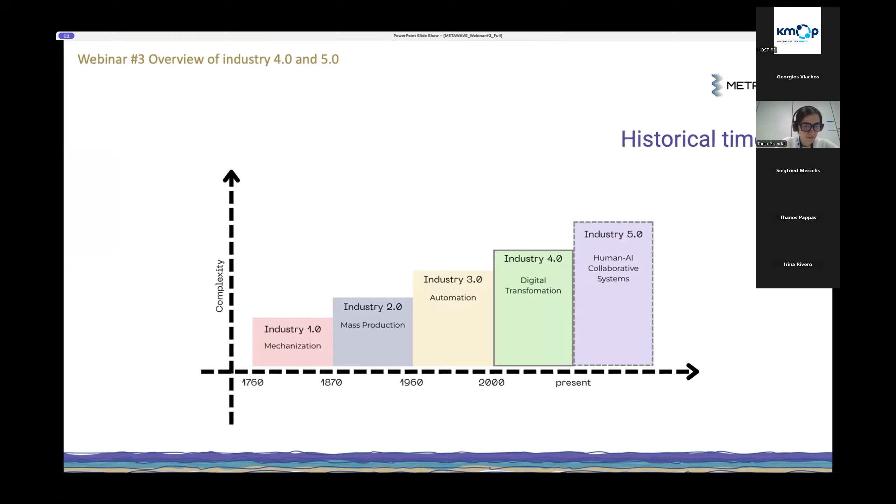Let's frame our discussion by identifying the key characteristics and differences between Industry 4.0 and 5.0. To do so, it's useful to take a quick look back and overview the progress of the industrial revolution.

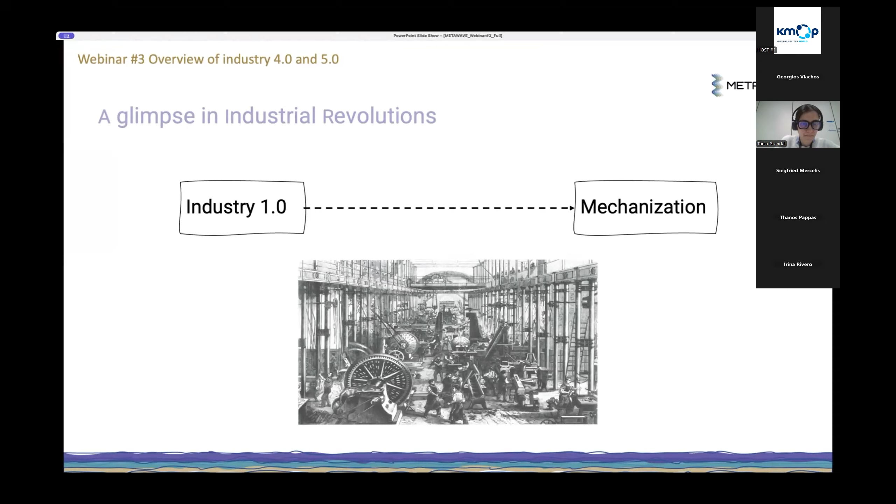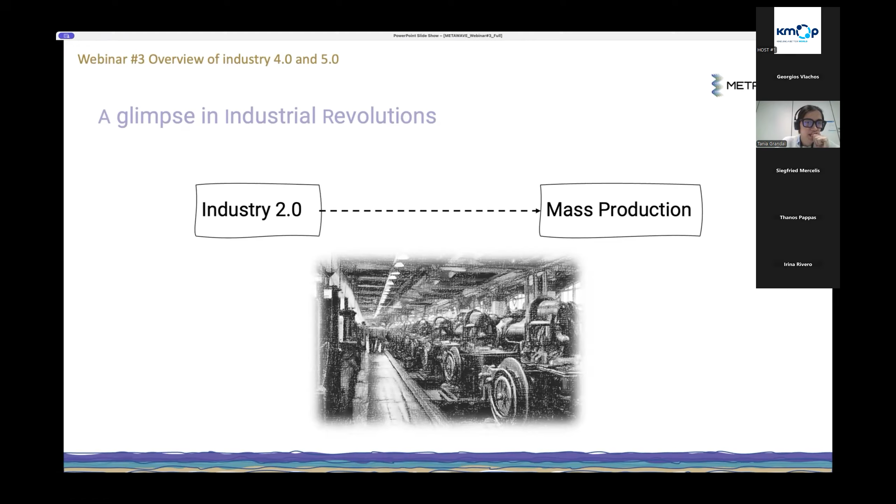We have Industry 1.0, which took place in the 18th and 19th century and introduced mechanization through water and steam power. Then we have Industry 2.0, which occurred in the late 19th and early 20th century, which brought mass production driven by electricity and the assembly line.

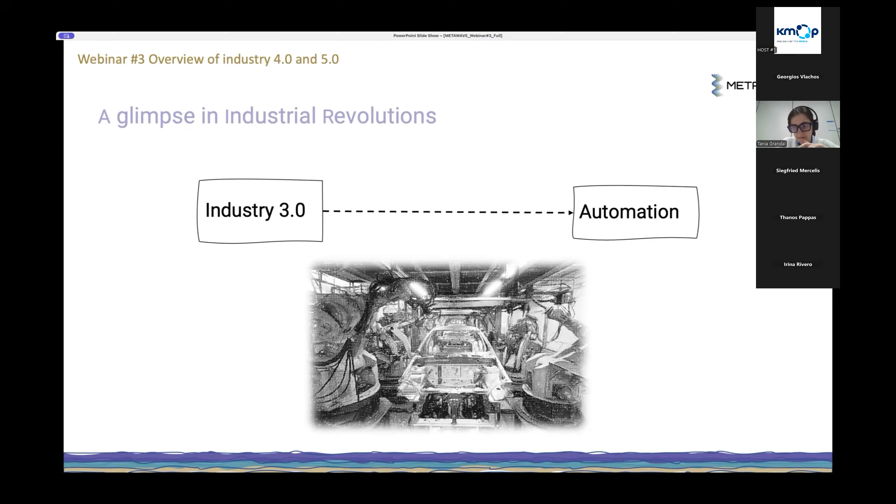Afterwards, we have Industry 3.0, which started and finished in the 20th century and saw the introduction of computers and automation. Then we arrive at Industry 4.0, the current phase, where machines have become smart and connected.

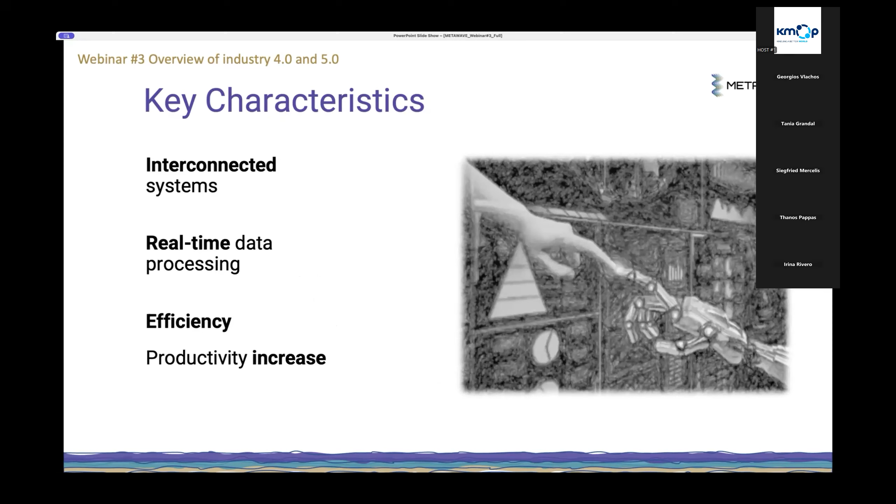At the core of Industry 4.0 is the fusion of cyber-physical systems, the Internet of Things, and cloud computing. This has enabled machines to collect, share, and act on data, fundamentally changing how we produce and operate. Key features include interconnected systems, real-time data processing, and a strong focus on boosting both efficiency and productivity.

The backbone of Industry 4.0 includes the Internet of Things for smart connectivity, AI for intelligent decision-making, cloud computing for flexible infrastructure, big data analytics to extract insights, and cyber-physical systems that bridge the digital and physical worlds.

These technologies drive innovations like smart factories, digital twins which represent virtual replicas of physical systems, predictive maintenance, additive manufacturing, and even autonomous vehicles.

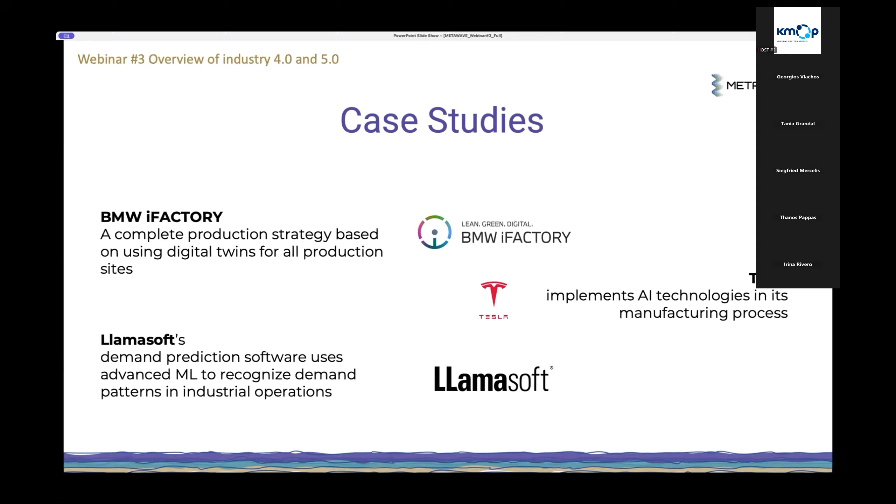For example, BMW's iFactory strategy leverages digital twins to optimize every production site. Tesla uses AI extensively in its manufacturing processes, and companies like Llamasoft are predicting demand using advanced machine learning.

So what's next? That's where Industry 5.0 enters the discussion. Industry 5.0 reintroduces the human touch. It's about using technology with people, not just to replace them. It values creativity, resilience, and sustainability alongside productivity.

This new phase prioritizes a human-centric approach, ethical and sustainable production, innovation through human creativity, and meaningful collaboration between people and intelligent systems.

Some applications include advanced human-machine interaction through extended reality, which includes virtual reality, augmented reality, and mixed reality. For instance, AR can project live maintenance instructions onto a machine as a technician works on it, reducing errors and training time.

Smart factories not only automate processes but also allow for real-time human oversight and decision making that helps rather than replaces human insight.

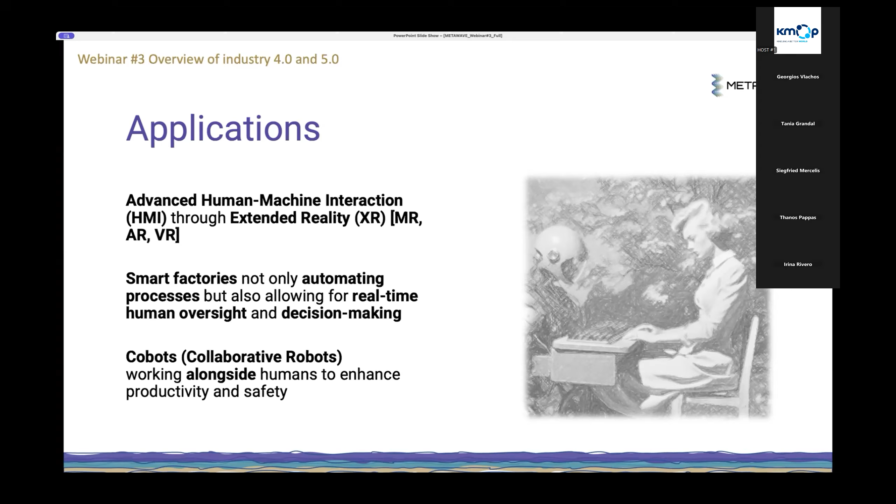Also, cobots, or collaborative robots, that work alongside humans.

Let's bring some of these ideas to life with real case studies. One great example is in healthcare, specifically in the area of robot-assisted surgery. You might have heard of the Da Vinci surgical system. It's a perfect case of human-machine collaboration.

Surgeons use this system to perform incredibly precise operations, but they are not replaced by the machine. They are in full control. The robot enhances the surgeon's natural hand movements, filters out tremors, and gives them a much more detailed view, we can say.

Another great example comes from Schneider Electric and their smart factory in France. They have integrated collaborative robots, real-time energy monitoring, and digital twin technology.

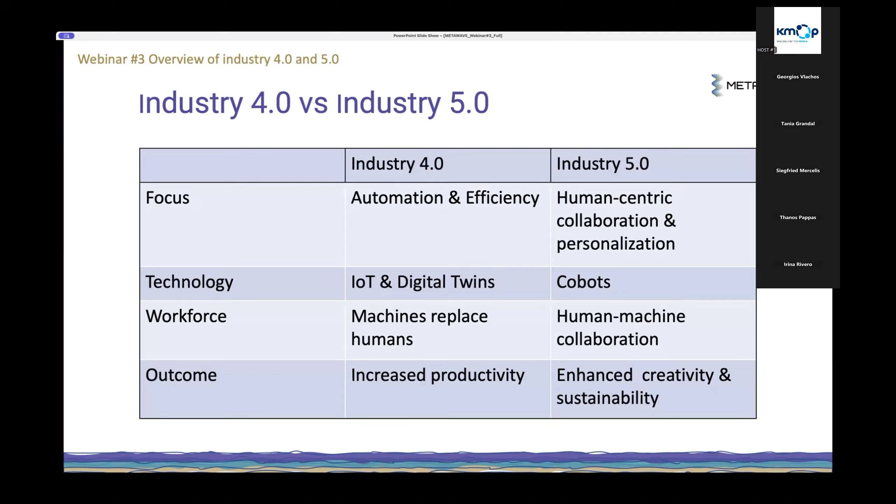So how do the two compare? Industry 4.0 is about automation and digital efficiency, while Industry 5.0 adds personalization, human creativity, and sustainable values.

Bridging these eras means creating environments where digital and human elements work seamlessly. That's where immersive tools like the industrial metaverse come in. This virtual environment mirrors real-world industrial systems, allowing simulations, training, and decision-making to happen in real time.

AI and machine learning remain foundational to both Industry 4.0 and 5.0. While manufacturing leads in adopting these changes, more traditional industries face challenges due to older infrastructure. Strategic planning is critical for successful integration.

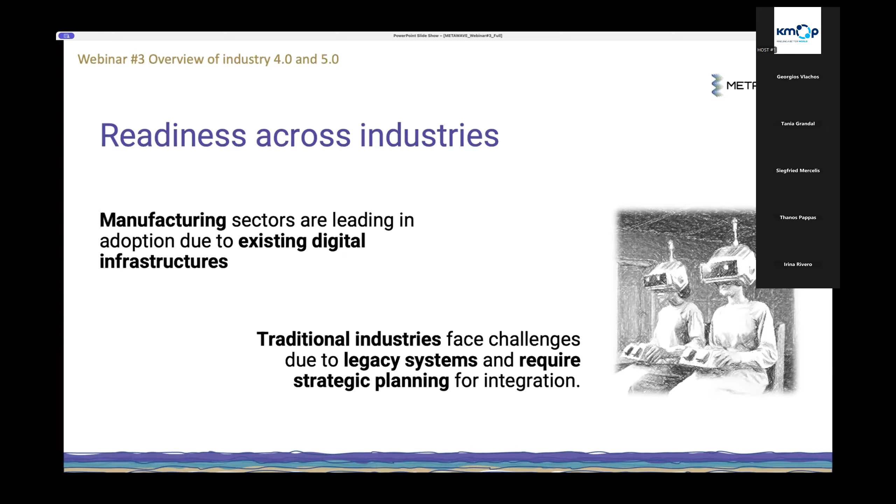In summary, we are moving from smart automation toward a truly collaborative future. That's all from me. Are there any questions?

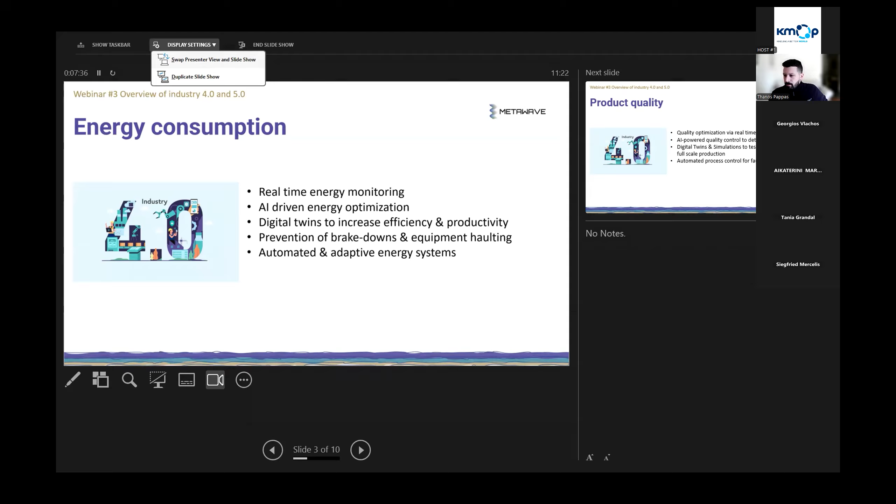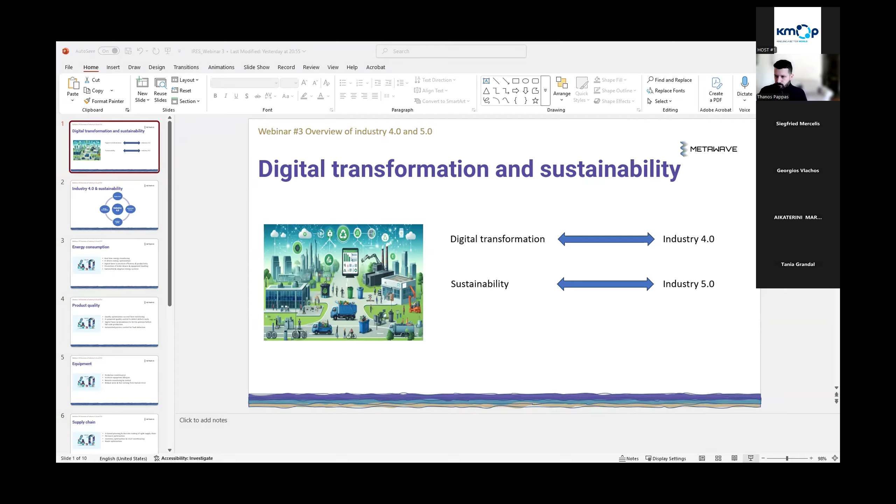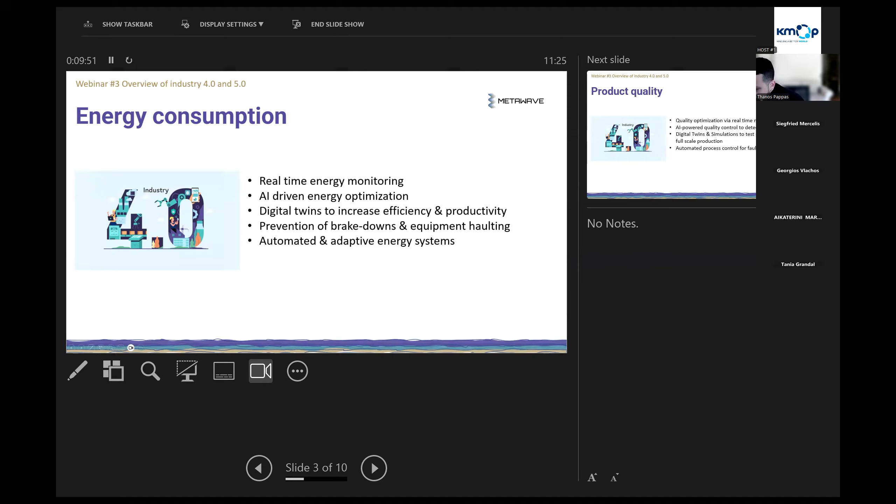Okay, it's enough. Sorry. Which screen I'm sharing now? Digital transformation sustainability. But is it like the whole presentation, or just the presentation mode? It's not full screen, it's just a PowerPoint that we're seeing now. If you share your screen in general and not the specific PowerPoint, this is like because I have two screens, I wonder which one of the two is going to share. Which screen are you seeing now? The third slide. Yeah, but is it the full slide? Because if it is the full slide, then we're good to go. Presenter mode now. Yeah, now we're seeing the full screen, now it's the full slide, yes. Okay.

Okay, so I'm going to continue from where I left. Now you can see the slide which says energy consumption and only that, right? Yes, that's right. Okay.

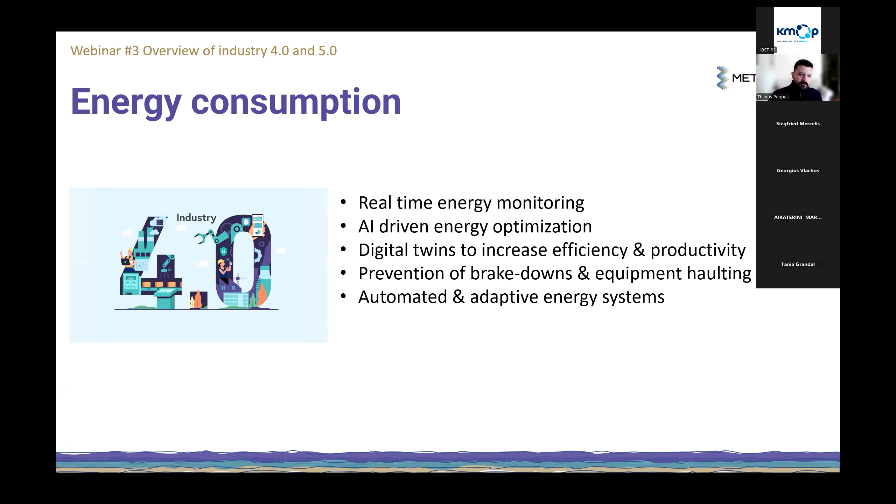We were in Industry 4.0 and how this is linked with sustainability, and we touched upon the part of how the reduction in energy consumption can lead to significant sustainability benefits.

And now we move from energy consumption to product quality. This is another part where we know that improving product quality is one of the results of digitalization and Industry 4.0, but it's not just about making better products when we talk about product quality. It also supports sustainability as well.

So this is what we're trying to do in this presentation, make the links with the different benefits that come along with sustainability. So there would be a direct link between sustainability by reducing waste, minimizing resource use, and extending product life cycles by increasing product quality.

For example, with real-time monitoring, the manufacturers could assess the quality as it's being produced, and that would allow for immediate corrections, and that would also lead to waste reduction.

As well, the digital twins and simulations provide another advantage. As we said before, before anything is physically produced, manufacturers could run virtual tests, optimize every part of the production process, and that would ensure a higher quality output right from the start, lowering the chance of having to run the process again and increasing the usage of materials and the increase of waste.

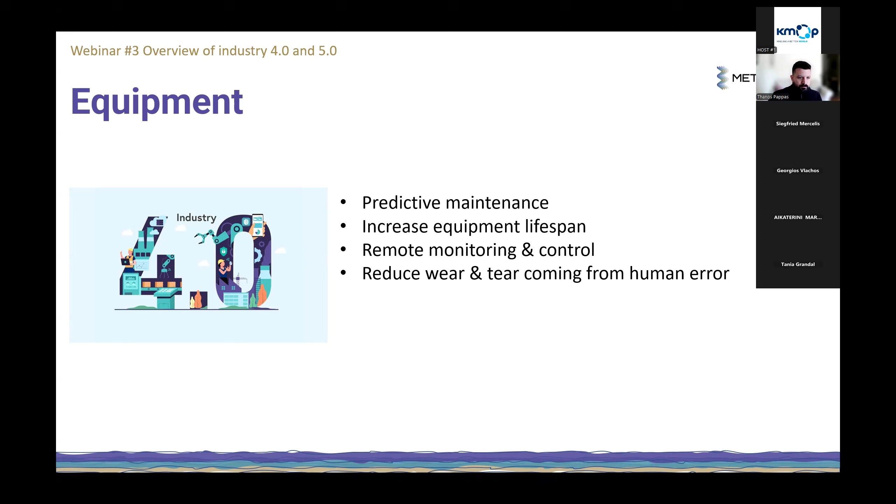And finally, we have also the pretty self-evident point of reducing wear and tear coming from human error, keeping optimal energy use and reducing unnecessary stress and maintenance on the machines.

Finally, the impact of digitalization on the supply chain and how this is linked to sustainability. AI and digitalization changes are revolutionizing supply chain management by enhancing how effectively and how agile it works.

In terms of planning and decision making, we could use predictive analytics to forecast demand, optimize production and schedules, and respond to disruptions in real time.

And that would mean much better resource optimization, which could leverage machine learning to improve capacity management and labor allocation.

Finally, with route optimization, real-time optimization of traffic, weather, and real-time conditions, we could ensure the fastest and most effective delivery routes, which could also in turn reduce the CO2 footprint of transportation linked to the supply chain in the industry.

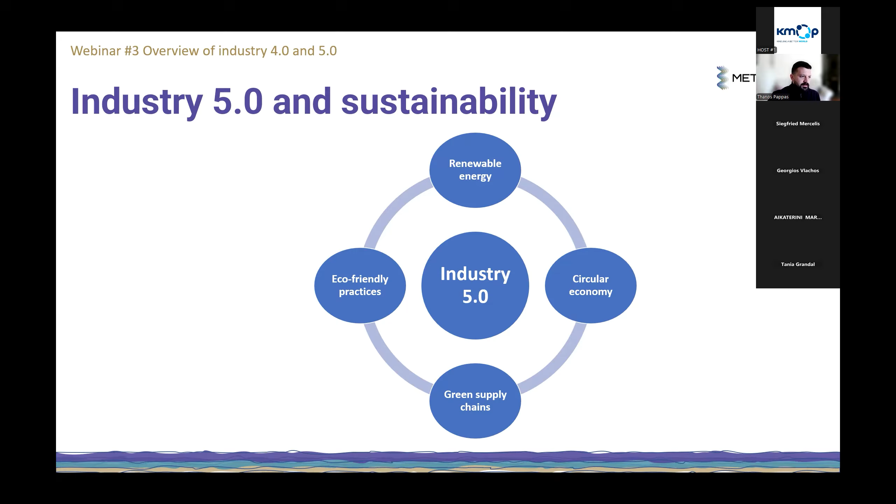And the final part of this presentation, because so far we were talking about Industry 4.0 standardization and how this is linked to and increases the environmental benefits and sustainability. For Industry 5.0, the work becomes easier because more sustainable processing is not just the result following digital transformation like we saw for Industry 4.0, but now for Industry 5.0, this is a driver. So sustainability is an actual driver of these changes. Now we see that Industry 5.0 is in the middle, and around it there is renewable energy integration, circular economies, eco-friendly practices, and green supply chains.

I'm going to start with the eco-friendly practices in the industry. We don't need to think hard about how this is linked to sustainability. As we said, eco-friendly practices in the industry would completely reset the way we expect manufacturing to work, making industries both sustainable and efficient with energy efficient smart factories or zero waste manufacturing, where products would be reused, recycled, and upcycled. Through this innovation, waste would become a valuable feedstock or resource that would minimize landfill impact.

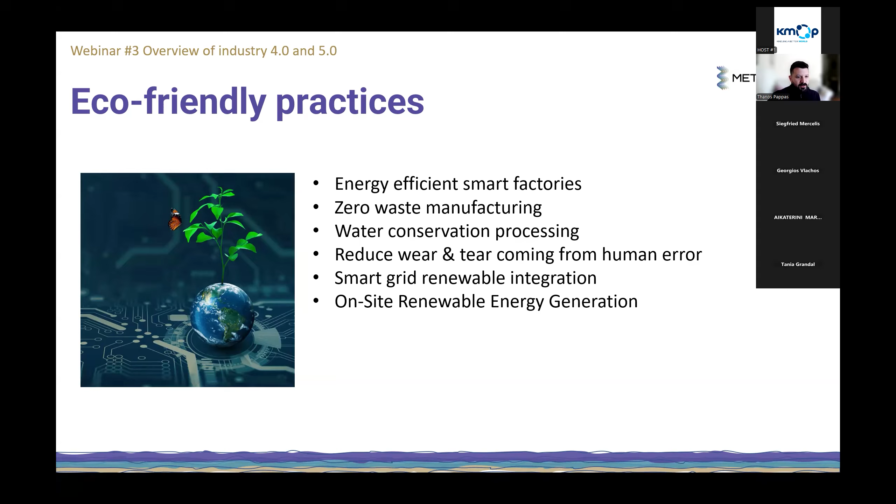Water conservation is also very important. Advanced systems will track and reduce water usage. We could reduce wear and tear from human error, as we also mentioned from Industry 4.0, and also fully integrate renewables into the processing, going towards zero net emissions.

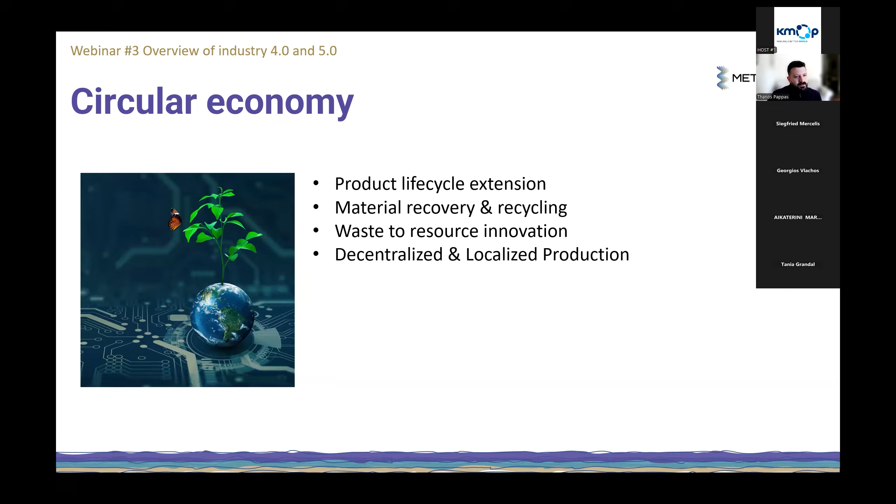The second part is the circular economy. That would be about, in Industry 5.0, completely rethinking how we create, use, and dispose of products. So the product life cycle would be fully extended. Instead of products ending up as waste, we would design them to last longer, and be able to replace them, refurbish them, or repair them, essentially giving them a second life. This is also linked to the second bullet, material recovery and recycling.

The third bullet is about waste to resource innovation, which could also be one of the main pillars of circular economy. What was once considered waste could now be a valuable resource, which could completely transform the waste into new material or energy. And finally, decentralized and localized production where it's needed, which would reduce transportation, reduce cost, reduce emissions, and enable more efficient use of local resources.

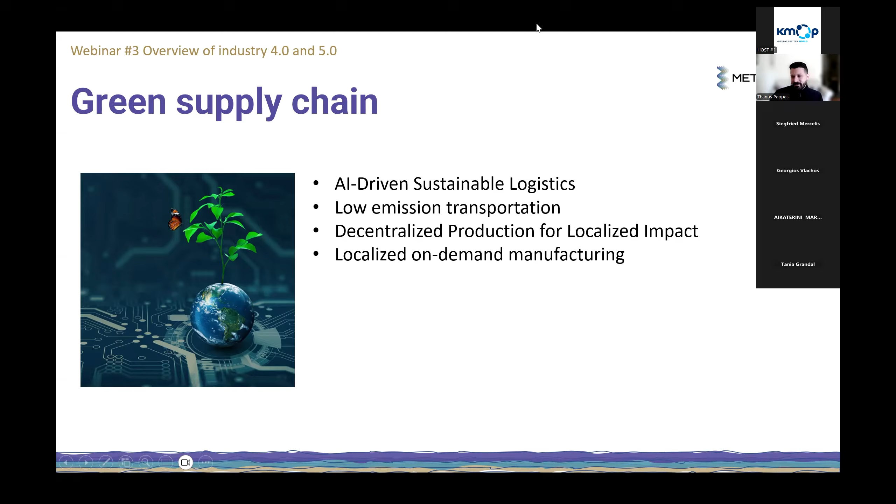This concludes the part on Industry 5.0, and also how transitioning from Industry 4.0 to 5.0 is linked to significant sustainability benefits in the industry. Thank you very much for your attention, and sorry for the small technical issues with my multiple screen setup here.

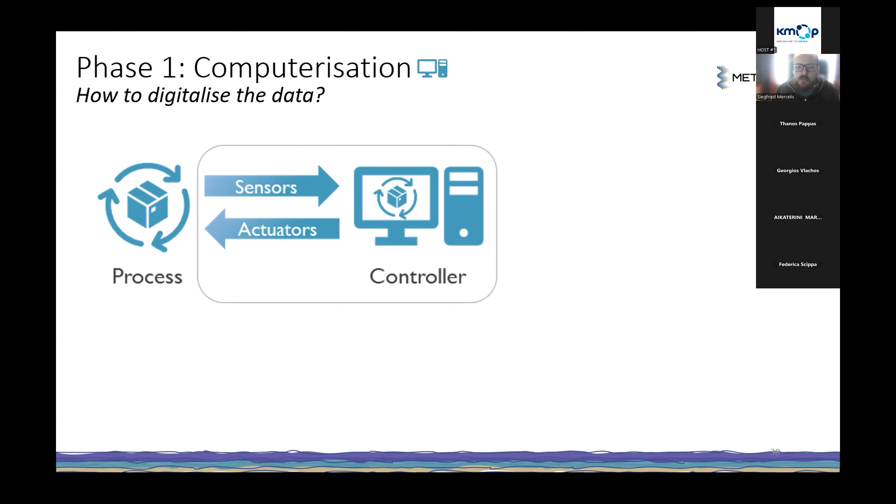What this comes down to is connecting whatever process you have to some kind of control system with sensors and actuators—the most basic form of digitization. You try to focus on digitizing isolated processes and automating basic tasks, where you'd typically have process automation specialists and control system operators. We're talking about basic digital systems like PLCs and some basic IT tools to replace manual tasks, plus professionals to set up the essential digital systems and support computerized operations.

If you take one step further, we're talking about connectivity—networking different processes together. Rather than having isolated computerized systems, we connect them through network infrastructure. This extends the required skill set with network engineers and IoT specialists, trying to connect the data between different processes and other systems. You also need a system integrator role that connects these different IT systems together, making sure the data flow over that network runs smoothly.

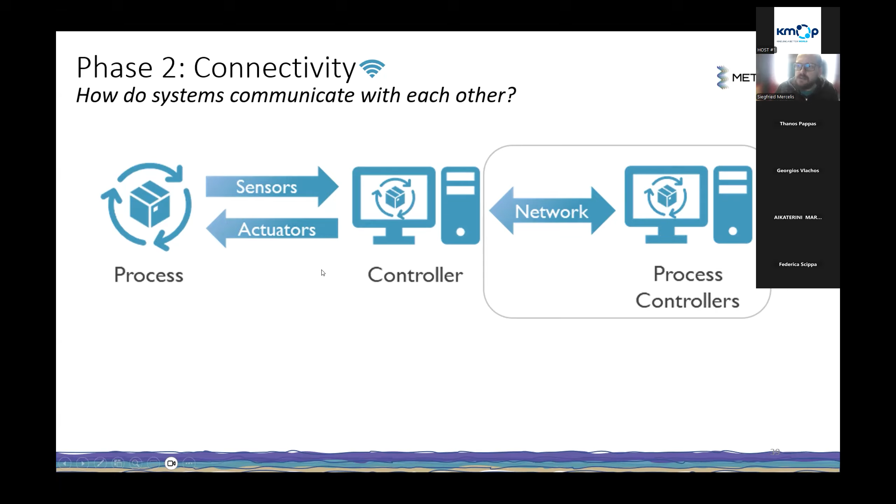Now this is just connecting machines and still automating basic tasks. We're not talking about artificial intelligence or really the 5.0 initiatives. It starts becoming interesting when we start dealing with the data that comes out of our systems.

The first step a lot of companies take is creating digital twins of their systems—a copy that can be just a shadow copy of the process data, or a full-blown simulation model running in parallel with the system, on which they can run more advanced analytics. The essence of this stage is capturing real-time data across these processes and building a digital model of the operations, where you'd typically see engineers with a background in sensor integration and data acquisition, as well as engineers who develop and manage these virtual replicas, monitoring them in real time.

If we go beyond just making everything visible in the digital twin, we end up with transparency. Essentially, what we try to figure out in this phase is why certain things are happening in the process, converting raw data into actionable insights and understanding process interactions. Here, the roles of the data analyst and business intelligence professionals start playing a major role, transitioning from complex data sets to clear insights and really analyzing what is going on.

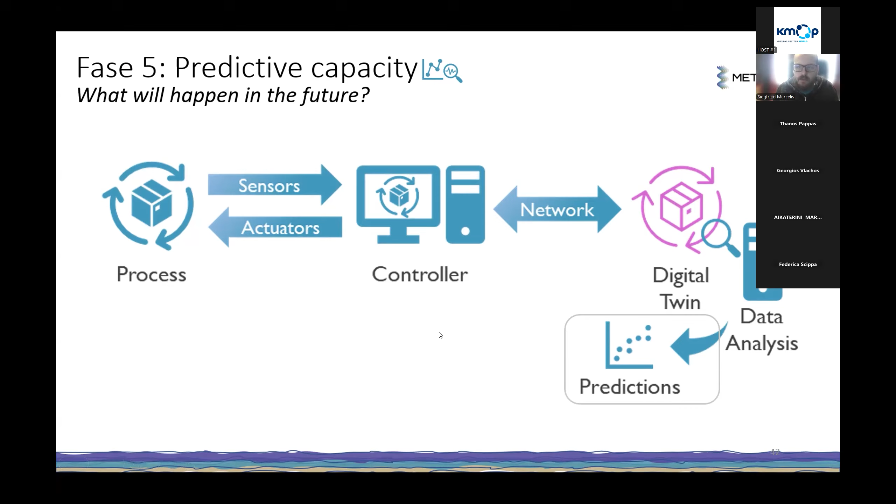The next step is to go towards predictions, using historical and real-time data from the digital twin to forecast future events. Here, the role of data scientists or machine learning engineers becomes much more prominent, because analyzing that data and making predictions allows us to spot trends, enable predictive maintenance, anomaly detection, and so on.

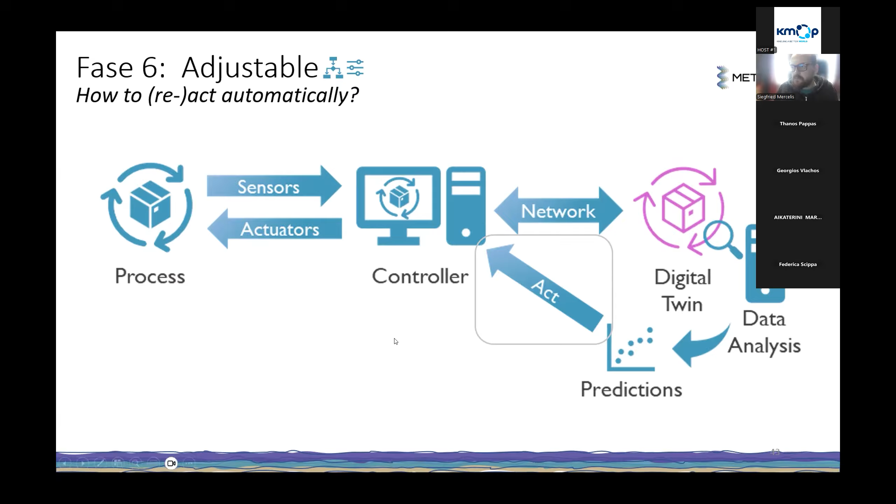The final stage from the 4.0 perspective is making everything adjustable—enabling the system to autonomously react and adjust to changing conditions, taking into account the data analysis and predictions. You'd have automation and robotics engineers supporting the development of these autonomous systems, and AI deployment specialists focused on digital transformation, overseeing continuous improvement and integration of advanced AI and automation systems—essentially closing the loop from the digital twin through analysis and predictions, back to the controller, and taking effective action based on these insights.

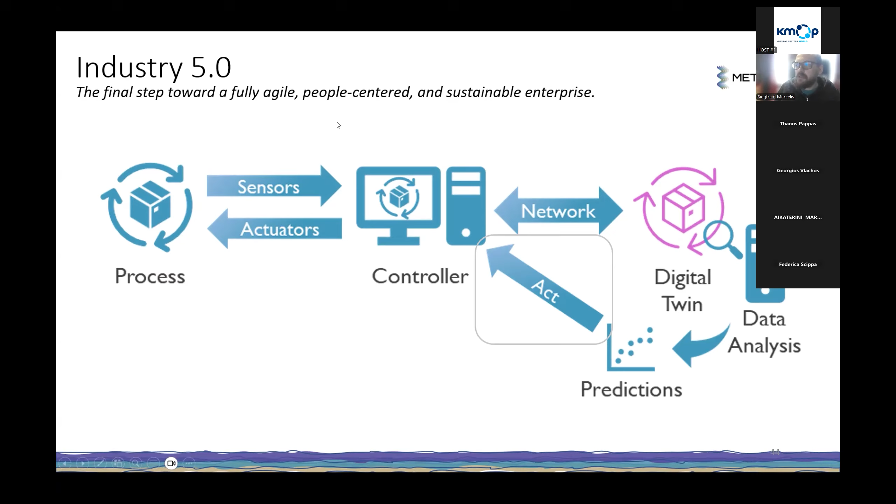If we then go towards Industry 5.0, we can build upon this entire stack. What 5.0 essentially does is add an agile, people-centered, and sustainable layer on top of it. If we focus on the human-centric aspect, some things that could be added in this phase would be, for example, augmented reality on top of the digital twin for collaborative troubleshooting, providing contextual insights and making the data transparent to end users and operators.

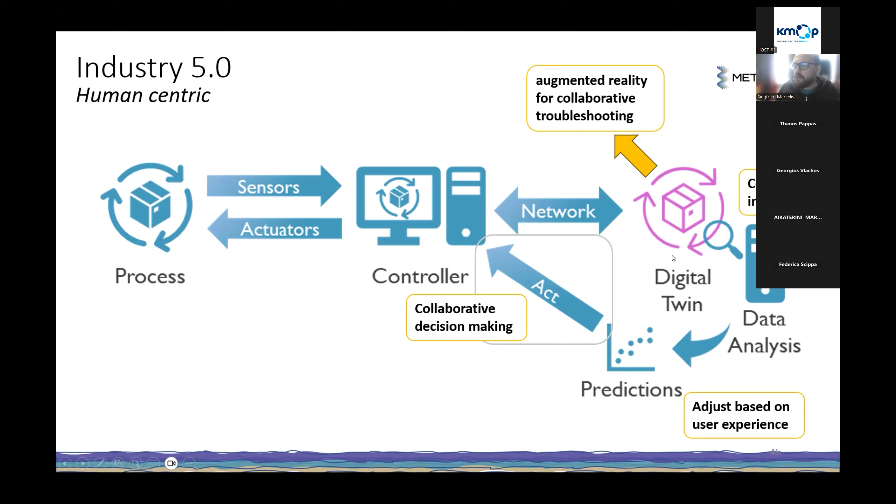We could also adjust the predictions based on the experience of the user, try to give inputs to the models from experts, for example. And of course, make sure it's not just a fully closed loop autonomous system, but really a collaborative system where the end user could interact and use that prediction and automated control system as decision support.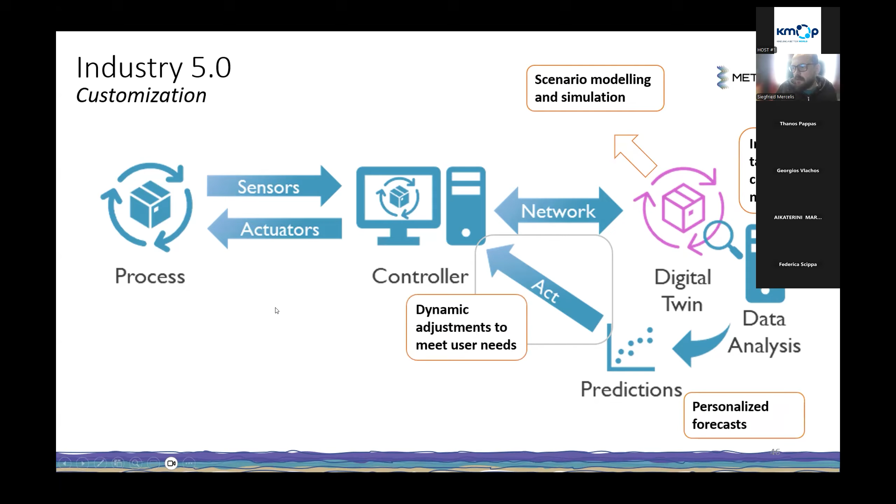On top of it, with customization, we can use the digital twin for scenario modeling and simulation, giving insights tailored to customer needs. On the data analysis side, make personalized forecasts based on the way of working of either an end user or the requirements of the customers. Also make sure the adjustments are not fixed, but can be adapted based on the end user's needs.

Similarly, for sustainability, we can top up this model by modeling energy flows, emissions, or waste generation in the digital twin. So really going from just measuring the process itself, to adding certain KPIs and metrics fully focused on sustainability, because we can then close that loop with the data science involved to integrate these environmental metrics in our analysis.

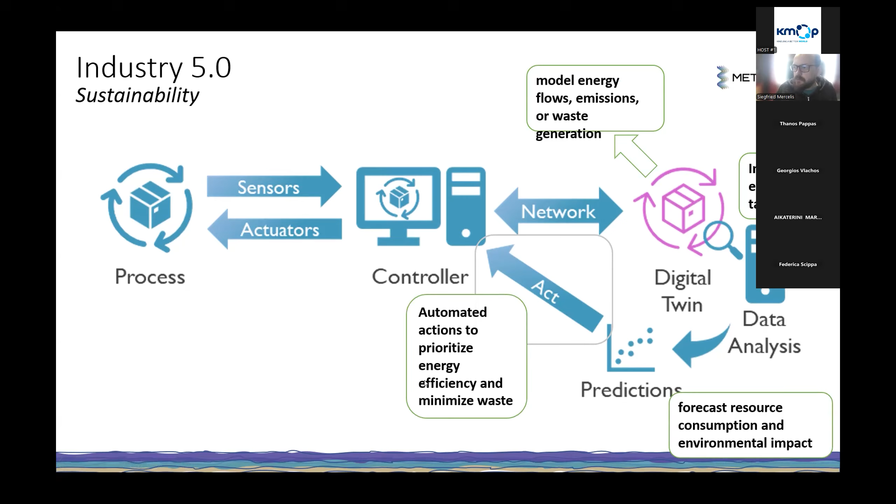Also try to forecast resource consumption and the environmental impact of our process, and then automate actions to prioritize energy efficiency and minimize waste. Take into account that when a process changes over time, such as costs of raw materials, we can dynamically adapt our process accordingly.

Now, considering the critical skills for this 5.0 perspective, if we summarize the skill set for Industry 4.0, we were looking at basic automation skills, process digitization, network systems, and implicitly some level of security when connecting systems together, especially if connected to an external network. Primarily for phases 1 and 2.

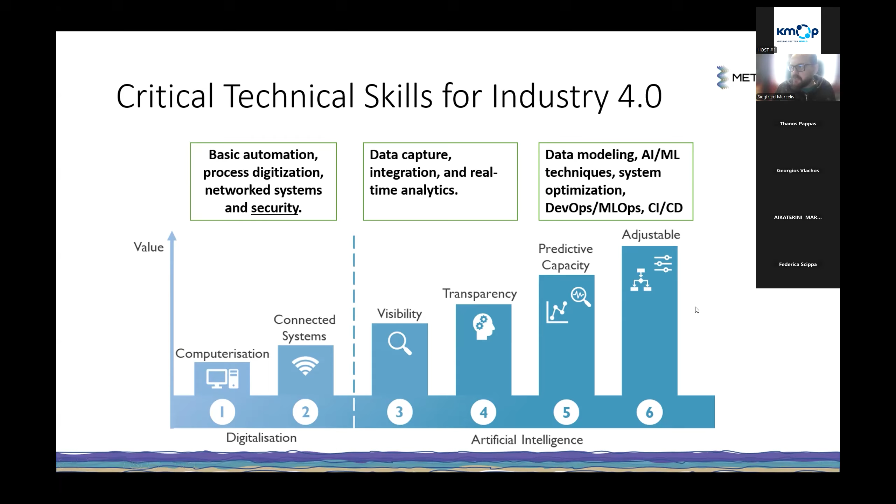Going higher up the stack, we think about data capture, integration, real-time analytics, and people who can integrate sensors and visualize and process that data. Then there's the entire data modeling, AI, ML type profiles, system optimization, and people who can actually deploy it - profiles that can deal with DevOps, MLOps, and continuous integration and continuous deployment.

Transitioning to such a system, of course, is not something that can rely on a technical skill set alone. This applies to both a 4.0 and a 5.0 transition. You need a bunch of supporting roles that can help you deal with this kind of change.

The first thing that's very important to consider is change management and transformation leadership. Whenever you try to implement something in a company that is unfamiliar, new, maybe groundbreaking, or completely changes the flow, you might get a lot of reluctance from the people working with these systems to adjust their way of working. It needs some kind of trust as well in that novel technology.

So throughout that transition, you need someone to oversee that cultural change and make sure all the different stakeholders - and this goes throughout the entire stack of the company, from people on the work floor to higher management - have clear communication throughout all these layers, that their concerns are factored in, and that everyone can gradually ease into this process of transformation.

Of course, whenever you deploy something, you can't just buy or develop technology and assume everything will work out of the box. You'd have to set up this digital transformation project and make sure that whatever initiatives you set up are monitored closely so you can anticipate potential risks. Also make sure the timing, budget, and impact are all factored in. You'd need someone with that holistic view to manage these projects.

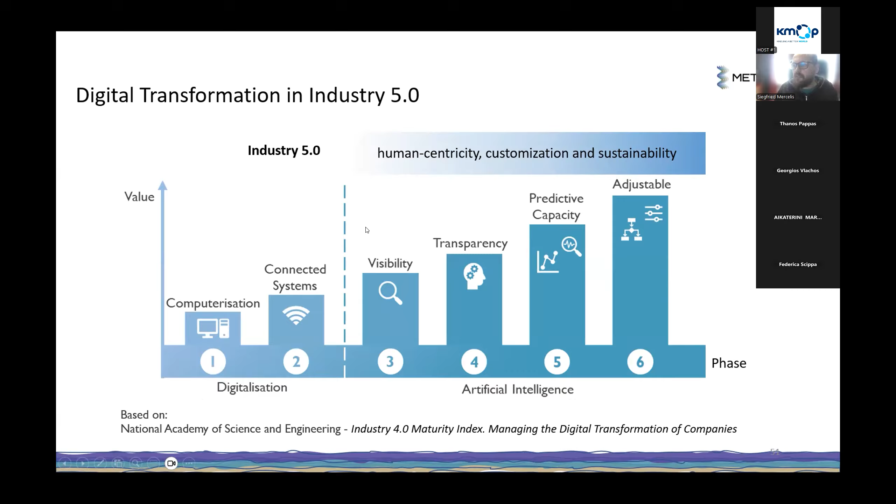Switching back to digital transformation in Industry 5.0 and the technical skills required: the general data science and IT background needed for the 4.0 transition still applies, but Industry 5.0 might require more specialized skill sets. For human centricity, you need someone capable of creating systems that enhance human interaction and decision making in industrial environments, starting with experience in building user interfaces so people can effectively interact with these novel systems, making sure the designs are ergonomic, user-friendly, and empowering for operators.

If you're looking into more advanced AR or mixed reality applications, as mentioned for the digital twin, you need someone with a background in developing these kinds of systems—a specialized software development skill set, but also someone who can design interfaces for augmented reality settings. This could be valuable for a real-time support system for operators, or immersive training using the digital twin environment.

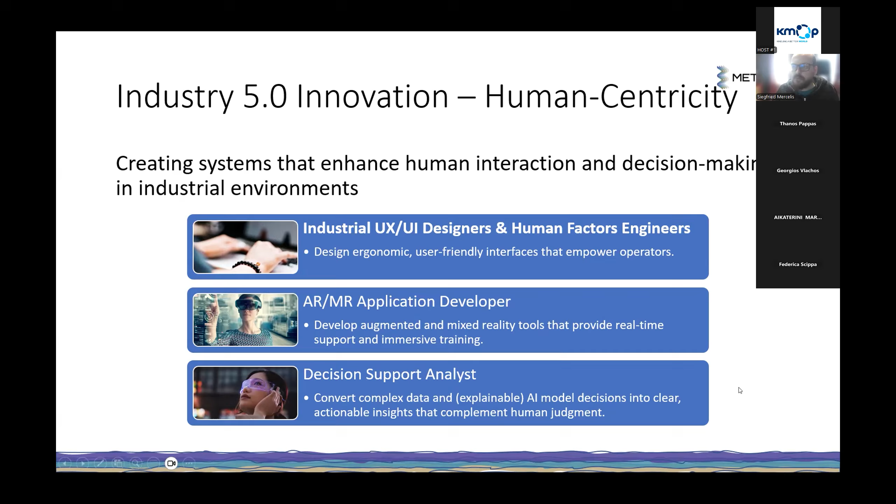When talking about decision support, we have people interacting with advanced AI-driven systems. You need someone who can turn whatever model, data, or insight is available into something that allows for advanced user interaction—converting complex data, possibly explainable AI models, into clear, actionable insights that complement human judgment, while setting up a system for making decisions together with the AI and steering it based on expert knowledge.

Looking at customization, this is about transforming production systems to adapt rapidly to different customer or end-user needs. A critical skill set is very agile product development and really thinking about how to design things—someone able to lead initiatives to develop flexible, modular production systems tailored to specific market demand, setting up a dynamic system.

Switching back to digital twins, if you need the digital twin to be adaptable to whatever the end user needs, this requires a more advanced skill set to enhance digital twins to support this. Similarly, for data scientists and AI engineers, deploying a fixed model is one thing, but creating models that are adaptable, transferable, and tailored to specific changing customer needs is also something to factor in during this transition.

On the sustainability side, you could consider this numerically as additional KPIs to factor in, but if you really want to create sustainable impact, you need a holistic view on your entire process and way of working—embedding eco-friendly practices throughout your processes and production, thinking not just about energy but also resources involved. A key skill is having people with a green process engineering mindset, capable of developing production processes that reduce energy usage and minimize waste—sustainable optimization of processes, which is often a multidisciplinary skill set ranging from software adaptations to changing hardware or core fundamentals of the process.

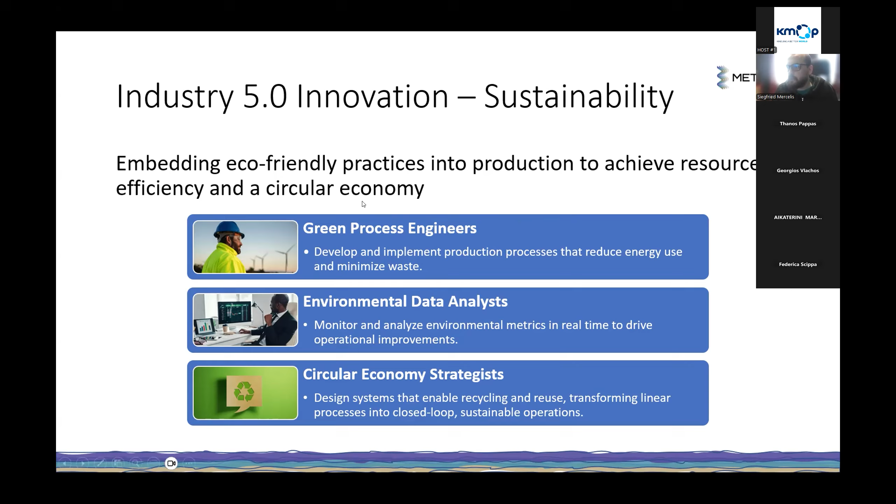Since we're talking about waste management, it's also about thinking beyond the company itself and setting up a circular network around it. Try to design systems that enable recycling and reuse of materials, transforming linear processes into closed loop, sustainable operations. This could involve different stakeholders, other companies that could repurpose certain waste materials, or setting up collaborative systems that further reduce your overall environmental impact.

Looking at the resources you could use for development and upskilling, I would highly advise going through the book on Industry 4.0, the Maturity Index, from which we borrowed the model with the 6 phases. It focuses primarily on Industry 4.0, but it's still very relevant since a lot of companies are still in those initial phases of digitization. It gives a much deeper insight into those 6 stages, and structural ideas on how to deal with resources, information systems, organizational structure, and culture within an organization.

Most of these ideas also translate nicely to the Industry 5.0 transition. There are also case studies and best practices to benchmark progress and drive continuous improvement. The link is here in the slides if you're interested, and you can also easily find it through any search engine.

What I would highly advise with skills is first to really develop the digital foundation of Industry 4.0, making sure you already have the core competences across these 6 maturity phases. Then, with the people you have, consider reskilling them towards that Industry 5.0 mindset, or find missing profiles if you still have gaps.

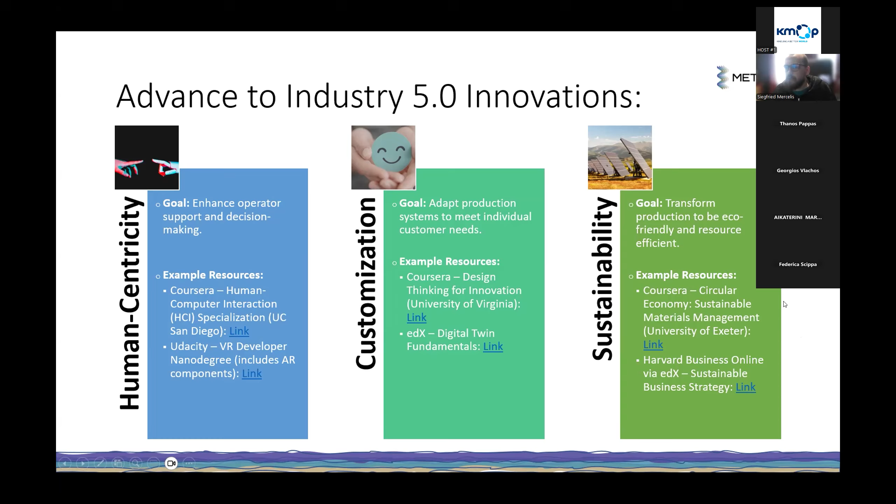There are nice resources available online, like how to develop digital twins, which also considers their adaptability, but also thinking about innovation in a Coursera course. Finally, on sustainability, there are specialized courses, for example in circular economy, but also on sustainable business strategy. So there's plenty of material out there that could be a good starting point for people you want to skill.

This brings me to the end of my presentation.

Some discussion points you could consider within your organization: try to assess what you think your current digital maturity is, using the maturity index as a reference, and consider from those 6 phases where you're at on those 3 pillars of Industry 5.0. Also think about which specific initiatives you're already considering and which skills you would need.

It's also helpful to reflect on past initiatives and see what you learned from these transformations, to identify potential pitfalls. As I mentioned, change management is crucial when making these kinds of transformations in a company. Make sure to check how the team is responding to the integration of these technologies — talk to people on the work floor, and talk to anyone up the chain in management.

Consider what the biggest challenges are in integrating Industry 5.0 in your existing digital frameworks, and maybe you still need to work on that foundation of 4.0. Once you make that transition, check whether it's more of a technological challenge or about finding people with the right skill set. Maybe it's about upskilling people you already have, or finding external talent or other researchers, for example.

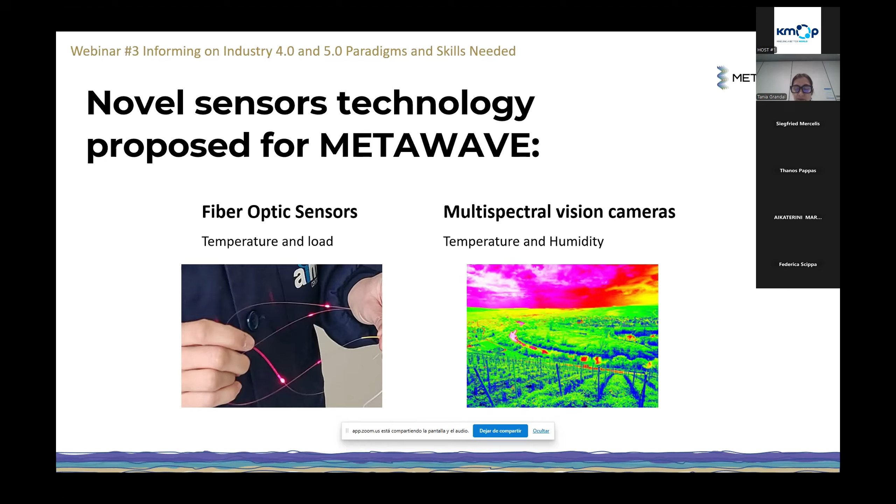For the METAWAVE project, we will use fiber optic sensors and multispectral vision cameras to integrate these technologies for monitoring the microwave heating systems that will be developed in the project. The fiber optic sensors will be used for monitoring temperature and load, and the multispectral vision will be used for temperature and humidity monitoring.

Why adopt new monitoring technologies? Normally, traditional systems have limitations in efficiency and precision. You need to introduce new monitoring technologies to improve the capabilities of these traditional systems and avoid errors or problems. The fiber optic sensors and multispectral cameras will be able to give you real-time monitoring data, and will give accuracy in temperature monitoring.

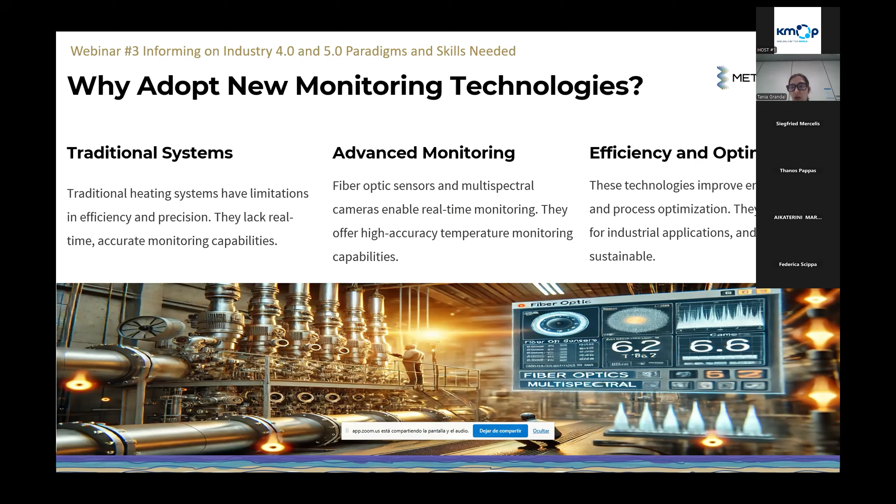And for efficiency and optimization, these technologies will help make energy efficient improvements in your industry.

The challenges and solutions in technology adoption: the company or employees tend to be resistant to change, because they have been working the same way for many years, sometimes since the beginning of the company. They don't want to change their comfortable way of working, and introducing new technologies sometimes makes changes they don't want to make.

The cost is also a challenge, because you have a process and a company with some budget, and you have to change and assume a new cost for introducing this technology, which is supposed to make you gain more money once these technologies are totally implemented.

Security and privacy are sometimes challenged, because some or most of the technologies work through the internet, and you will have to make some cyber security changes, or introduce cyber security measures in your company.

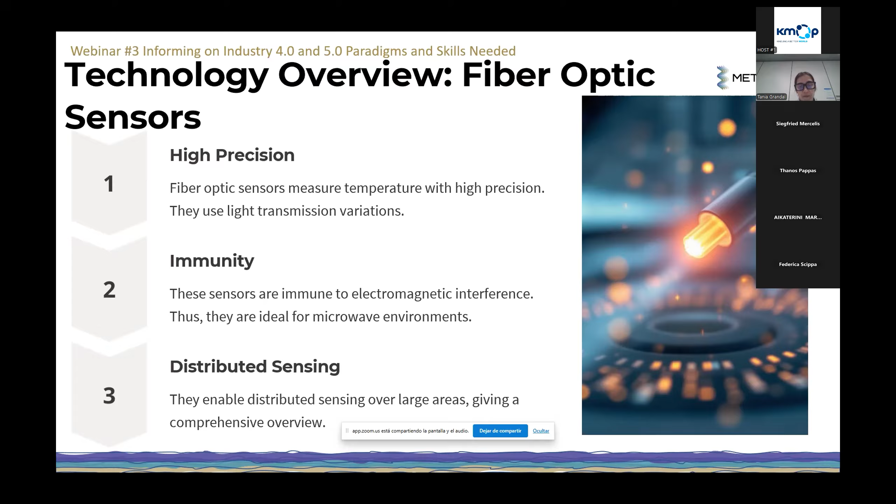This is very important when we talk about microwave systems, but also for other processes like welding, sometimes you need a sensor that will be immune from other electromagnetic waves. This technology offers distributed sensing, because you can go with the same fiber for kilometers of length, and you are measuring many points along this same fiber.

In the case of the multispectral vision cameras, these cameras offer high precision and high accuracy in terms of thermographic measurements, because they use many bands of the spectrum, and they are able to avoid emissivity errors. You can select the bands that are more convenient, and avoid the spectrum bands where you have conflict with other components, or maybe with dust or humidity or other possible things in your environment around the measurement.

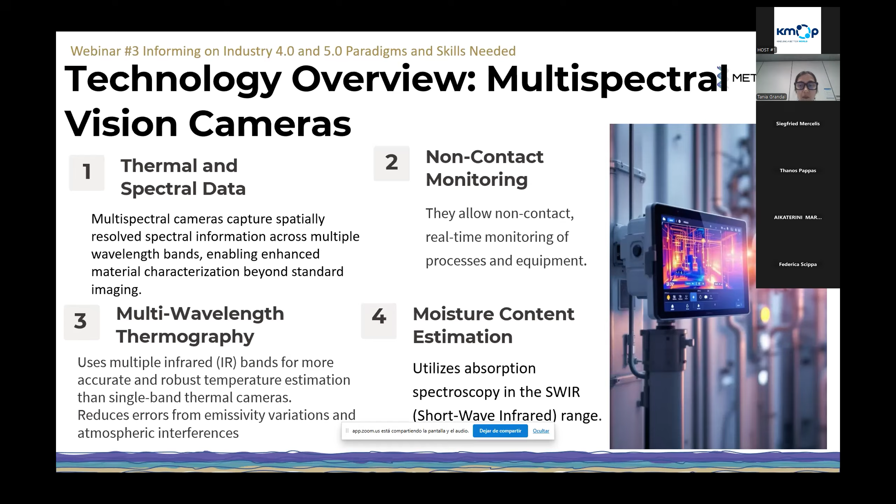It's a technology that is non-contact monitoring. Sometimes this is a key point, because sometimes you cannot touch the component, or maybe the component is in movement. Then these systems will be very useful for these applications. Apart from temperature, you can monitor or measure other multiple parameters like moisture, or even composition. Sometimes these cameras are able to monitor the composition of some components, etc.

Regarding these technologies in the METAWAVE project, we have 3 industrial use cases. The first is ceramics, with GRES Aragón, who manufacture ceramic tiles. At this moment, the challenge in this industrial use case is the high energy consumption, and we will integrate a sensor for monitoring the temperature along the oven of this company, for monitoring the very high temperatures of the tiles during production.

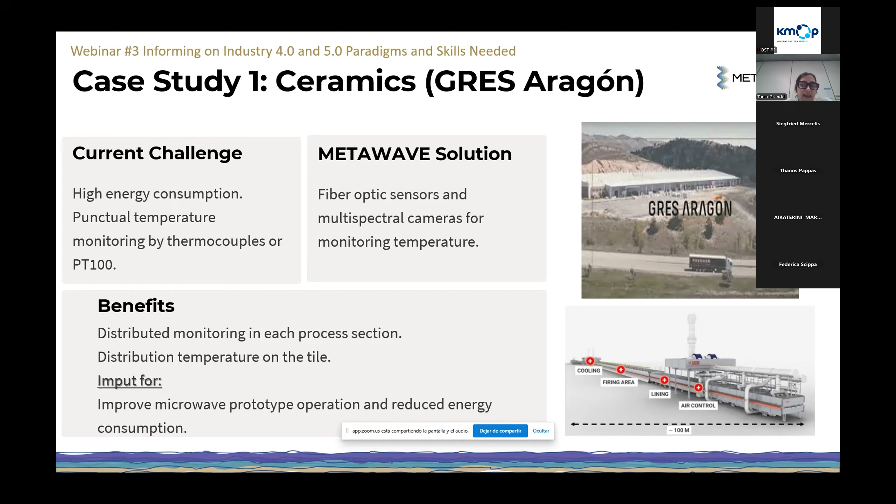We will also be using microwaves for the heating of this process. The METAWAVE solution is a fiber optic sensor for monitoring temperature, and also multispectral cameras for monitoring the temperature of the different steps of the tile production. The benefits of these technologies for this specific industrial use case are distributed monitoring, because we can use the fiber optic sensors to monitor along hundreds of meters or along the small microwave system that we will use. We will also use the camera for monitoring the gradient on the tile. This is more or less all for this industry use case.

The second industry use case is asphalt, for the COPHA company. The challenge here is that they have to heat the aggregates used for manufacturing asphalt, and they spend a lot of energy doing this, because they have to reach 200 degrees. With the actual system they use, they have to use more temperature to reach these 200 degrees in the aggregate in a homogeneous way.

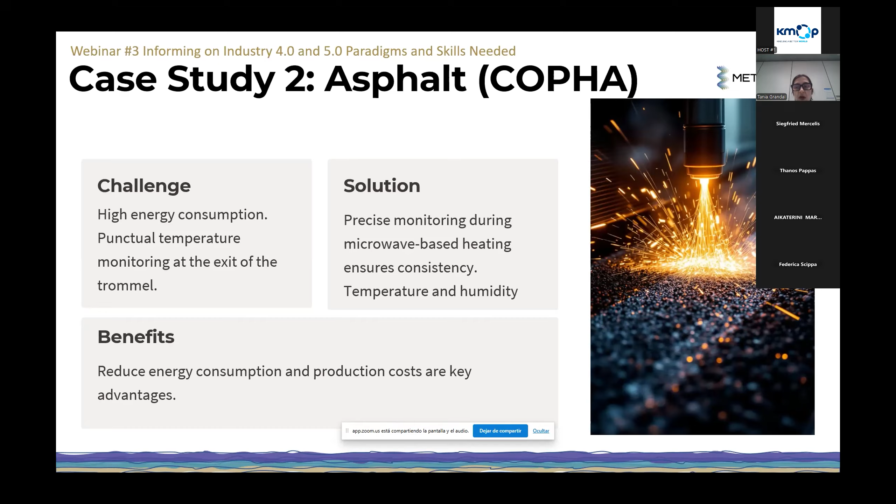The solution will be to use a precise monitoring system in the microwave system that we will use to heat these aggregates at the end of METAWAVE. We will monitor temperature here with the fiber optic sensors and the multispectral systems, but also humidity with the multispectral vision systems.

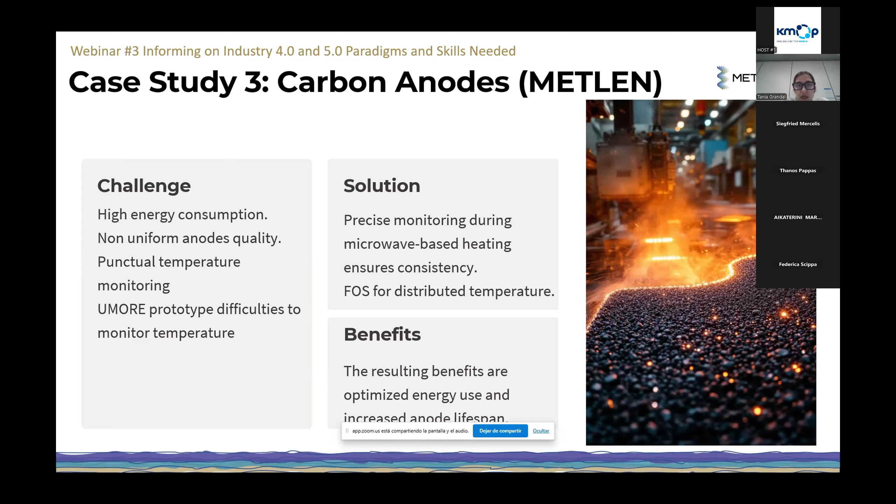In the third industry use case, which is metal processing, in the carbon anode manufacturing, the challenge here is also the high energy consumption for manufacturing these carbon anodes. In the METAWAVE project, a microwave-based system will also be developed to heat and manufacture these carbon anodes. Here the temperatures will be around 1,100 to 1,300 degrees, and we will only use fiber optic sensors here to monitor the temperatures during the manufacturing of these carbon anodes.

Okay, I put here some other applications that we have developed during the last years in different European projects in research and innovation actions.

The first is the ACHIEF project, where we use fiber optic sensors for monitoring HESA material, a high entropy superalloy material for coating the rollers used by ArcelorMittal in their oven. We embed the fiber optic sensors directly by laser welding into the HESA material during manufacturing of this coating, and then introduce this sensorized roller into the ArcelorMittal oven.

In the second case, we use fiber optic sensors for monitoring the pipes of a geothermal energy plant. The objective was to monitor the mass loss and degradation of the internal part of these pipes using the fiber optic sensors.

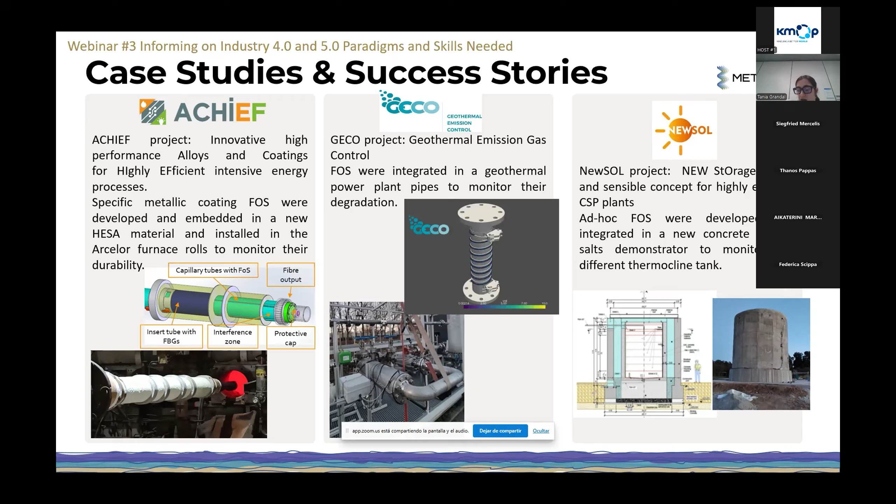The third project is NewSOL, where we embed fiber optic sensors in the different layers of a concrete tank for a thermal power plant. It was a novel tank because normally tanks are made from metals, but here it was made from a specific concrete developed in the project. We embedded sensors in the different layers to monitor the behavior of the tank and the molten salts inside it. Temperatures here were around 550 degrees, and it was very important to monitor the gradient of this big tank.

The last project I will mention used fiber optic sensors for monitoring the bearing of a ship. This component has an inner layer made of anti-friction material that degrades with operation of the bearing, and it is a very difficult component to access. We proposed embedding the fiber optic sensors directly by welding, in this case TIG welding, into the anti-friction layer, to monitor in real time the degradation of this layer and notify if something is going wrong.

I have here also two more projects where we use multispectral systems. In the Multiple project, these multispectral vision systems were used for monitoring temperature in a furnace. It's similar to the work we will do in the METAWAVE project for the GRES use case, because these cameras were integrated directly in the furnace, and we used this technology for discrimination of steel slab, thermographic analysis, and to define the composition of these materials.

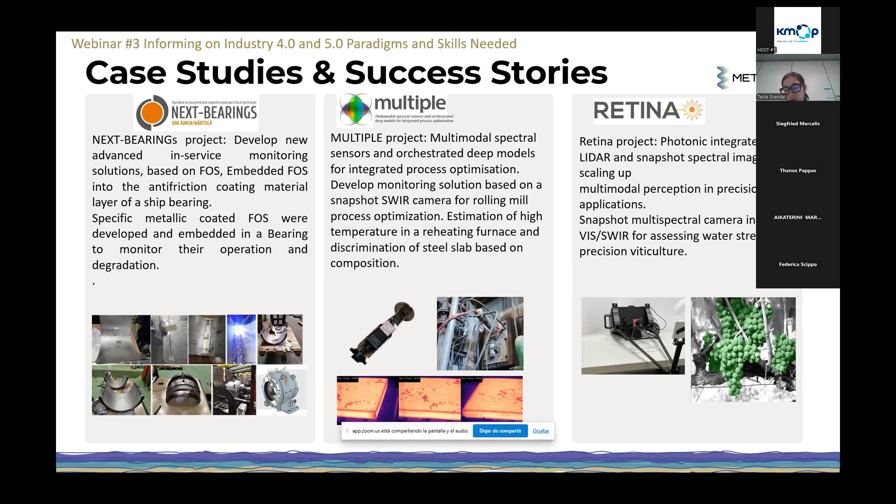In the Retina project, we integrated a multispectral system and also LIDAR. In this use case, it was for monitoring vineyards, and for determining the composition and status of the grapes.

This is more or less everything from my side. I hope that you understand a little better the problems and challenges when you introduce a novel technology into your industry.